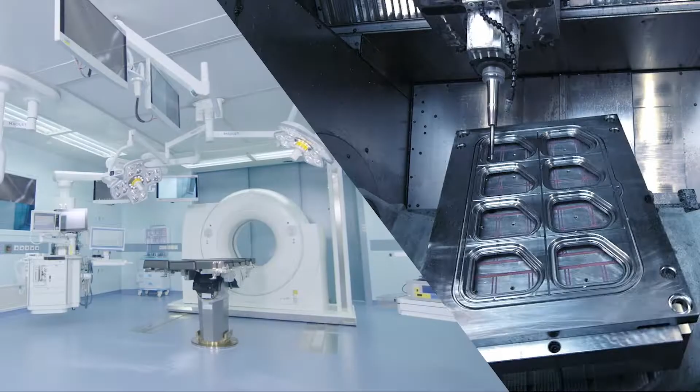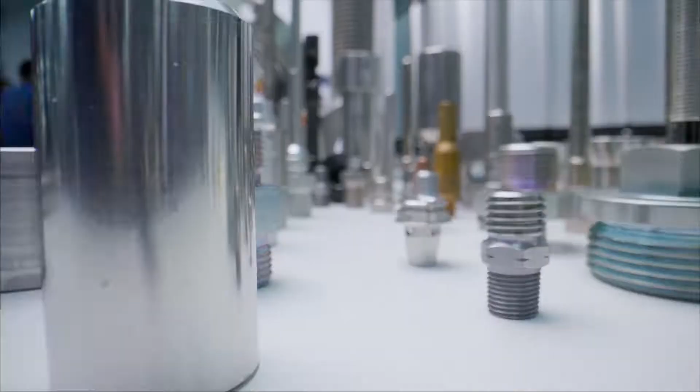Precision machined products are required in various industries, such as medical equipment, new energy vehicles, robotics, and hydraulic fluids industries. As an international provider of fastening and assembly technology, Bossard provides professional fastening solutions and one-stop precision machining services to enhance our customers' core competitiveness.

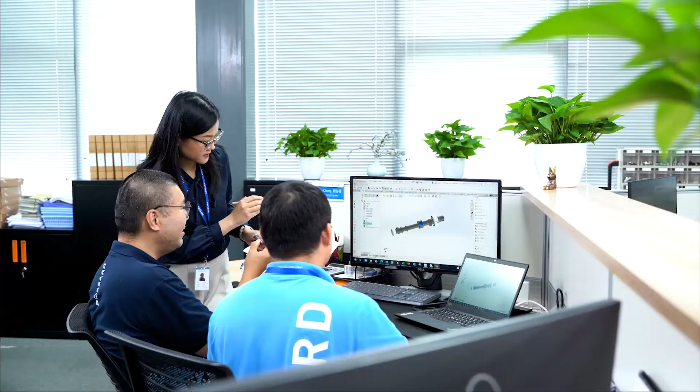Bossard's proven machined product solutions, professional technical team, and rich industry experience can provide you with customized parts in different materials, sizes, and precisions. We utilize various processes such as turning, milling, stamping, and bending to produce high-precision, small batch, and structurally complex machined products.

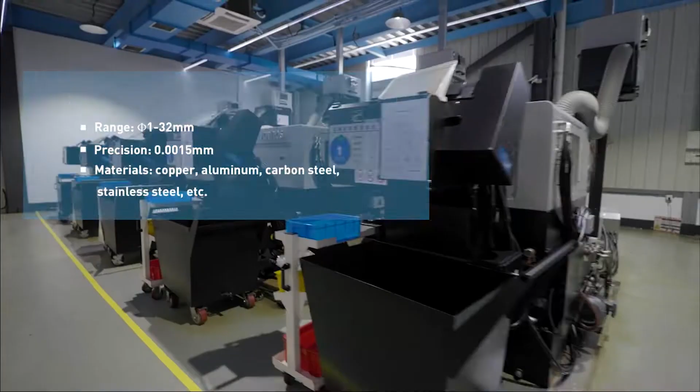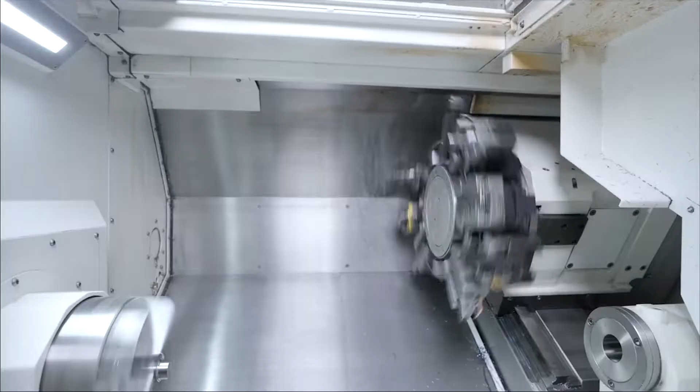At Bossard, our machining alliance is equipped with advanced 5-axis quadruplex mill-turn CNC machines from brands such as Mazak, Tornos, and DMG Mori, enabling high-precision parts to be machined to a precision of up to 1.5 microns.

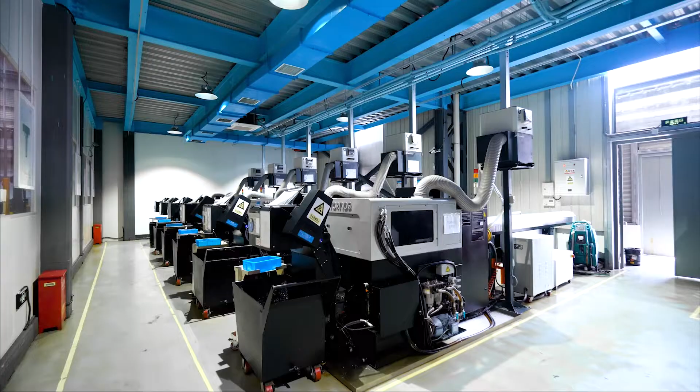Our machines are also equipped with product design software, such as SolidCAM. At the same time, we have adopted the manufacturing execution system to realize online scheduling and equipment capacity factor monitoring to improve production efficiency.

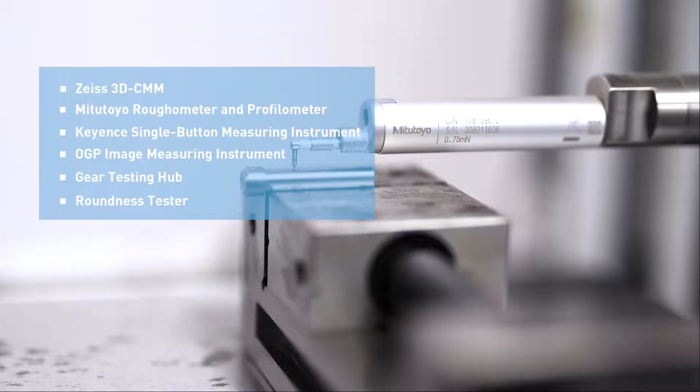At Bossard, we possess advanced quality testing laboratories equipped with professional testing equipment such as 3D CMMs, optical imaging machines, and roughness sensors. Through strict quality control processes, we can ensure the stable quality and data traceability of machined products.

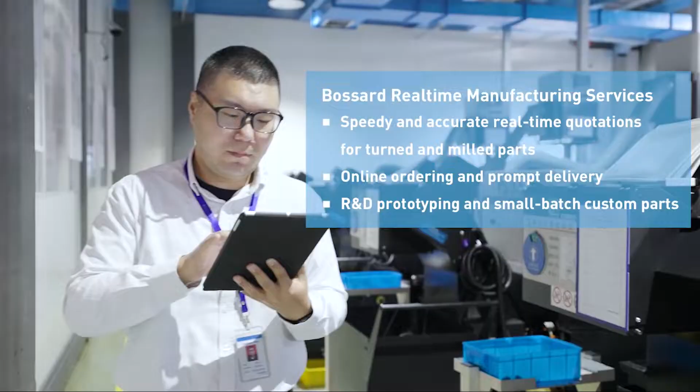Additionally, Bossard's real-time manufacturing services online quoting system provides customers with real-time quotations and one-click ordering for prototype samples.

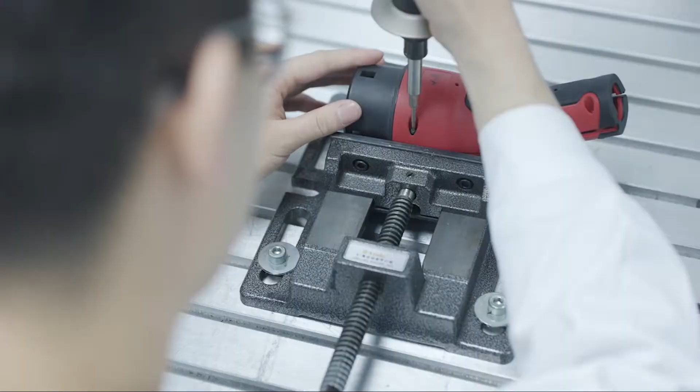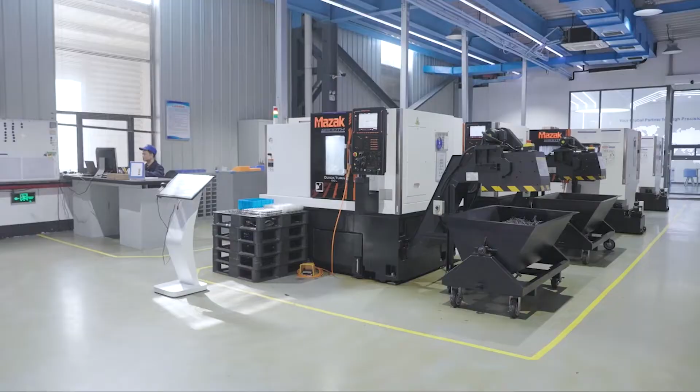Bossard's Assembly Technology Expert Service helps customers solve production assembly issues and optimize product design and production processes through a team of engineering professionals. As a professional one-stop provider of machined parts, Bossard provides you with high-precision, low-volume, multi-product machining

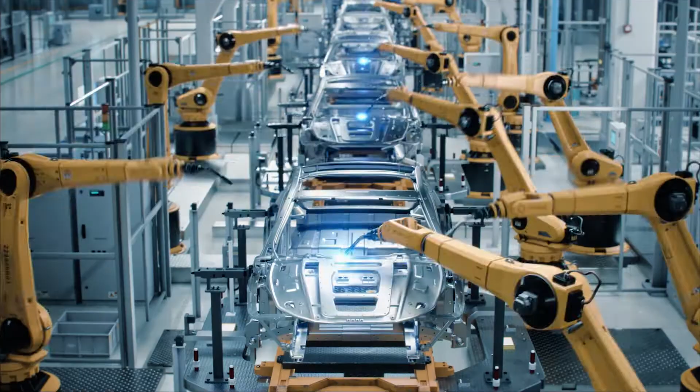solutions through our advanced CNC machines, testing equipment, and professional technicians, allowing you to devote more time and energy to product innovation and design development to stay ahead of the market.

A testament to Bossard's tagline, proven productivity.